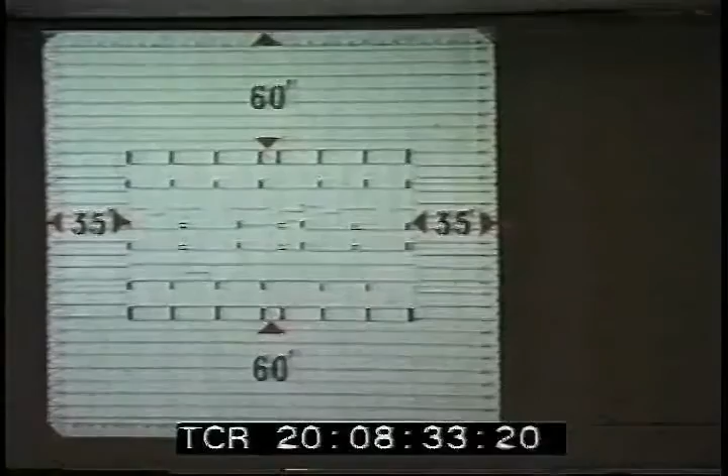So the structure has a 60-foot clear span on two sides and a 35-foot clear span on the other. One thing to notice is that the columns in this direction are very long and hence very strong. They're box columns, very big box columns. In this direction, there are lots more columns that you strike a line through, but they're, if you will, in a weak axis, so they're much less strong.

And a lot of controversy over moving all these businesses out of that space. A lot of controversy. But they were well compensated for it, of course, but I don't think you can really ever get compensated when you're upended. And this whole district disappeared out of New York. There was no replacement for it. So there was no place you could go. Instead, there was a store here and one over there and someplace else.

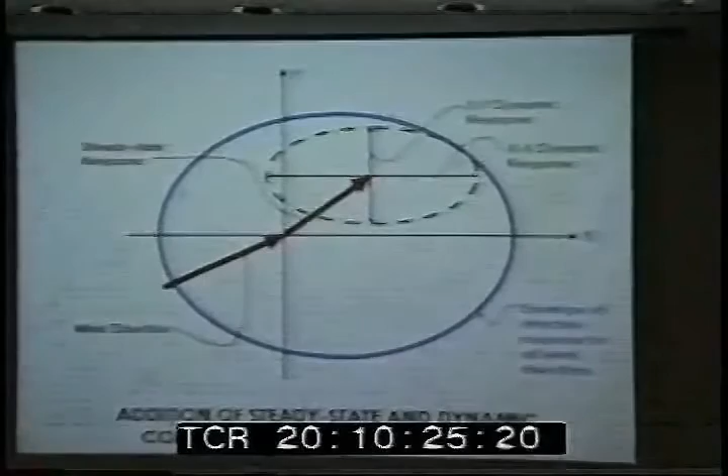Now, we surmised, we didn't know, but we surmised that in the wind, if the wind blows, say, in this direction, that the building would lean more or less downwind, not directly downwind, but more or less downwind, and then would oscillate about some place. This came from experience that I had in working on offshore structures. I knew that was kind of what they did, and I thought, well, a high-rise building might just do the same thing. You have to understand, the dynamics of high-rise buildings in the wind did not exist as a subject at that time.

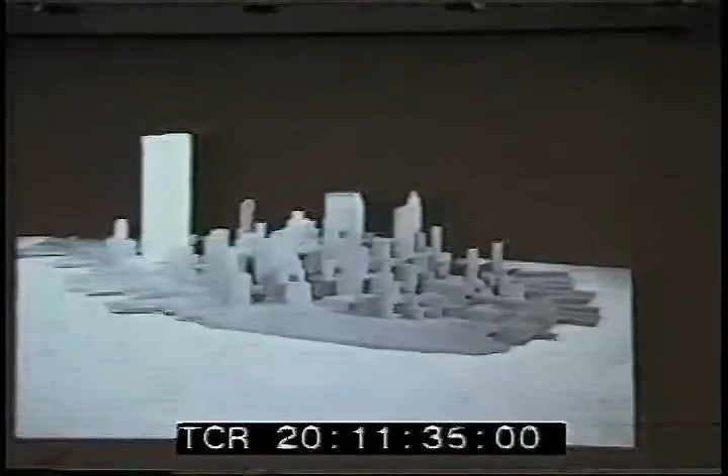So here you see an example. This was an anemometer on the telephone company building, now called the Verizon building, and you can see another anemometer on top of that spire.

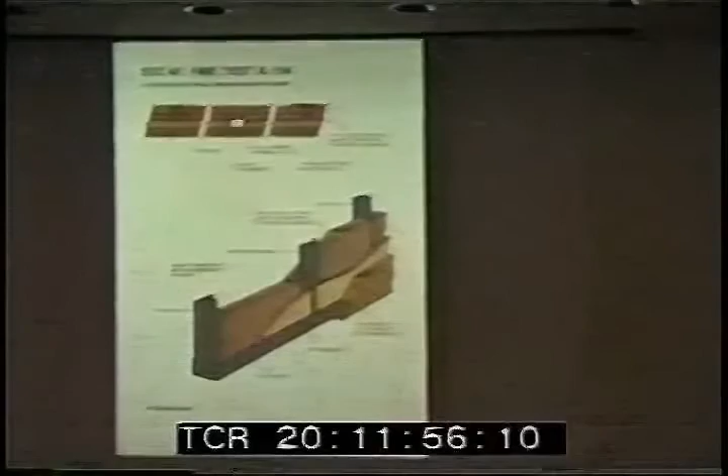The shaft wall partition system was wonderful because it was designed specifically to allow the structure to move without restraining it, and to stay airtight while moving. I arrived at the idea because I rode on top of a lot of elevators in New York City and went through all the buildings I could. The tallest building I'd worked on was 22 stories, so I thought people who'd worked in New York might know something more than I did, which for sure they did. I decided the basic partition system was terrible, sat down and came up with this concept, which was then developed by U.S. Gypsum.

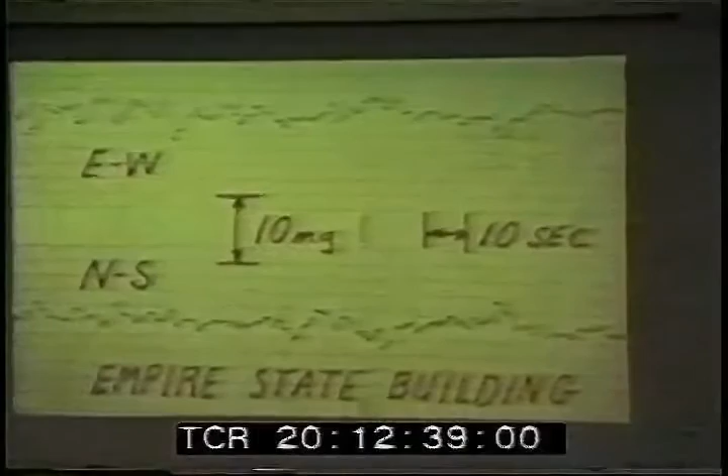We did a complete structural analysis of the Empire State Building. This is a trace taken from accelerometers on the building. You see it's almost random, with no neat oscillation found. The only way to come up with a period of vibration is to drop all this data into a computer and analyze it, and it tells you it's around 10 seconds, but you can't measure that here. So you'd say that's a 10-second period building—no way, it's entirely different.

But we did a structural analysis of the Empire State Building frame and found we could develop the stiffness of the frame, so we knew just how it would deflect under a given lateral load. Then, by taking this data from accelerometers and knowing the density, it's possible to experimentally determine the stiffness of the building. We found the difference was a factor of 5—the building was 5 times stiffer than the steel frame. That all came from the infill action of the masonry, and we were designing a building without any masonry.

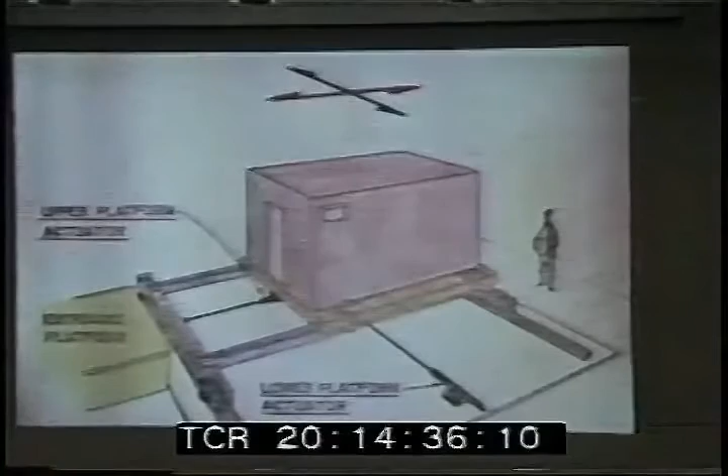We tested people who had no idea what was going on. It was very carefully disguised, so when you went into the simulator you didn't see any of this junk—you walked from a very nice little office into the simulator. We gave a little eye test, and then started the platform moving to see what happens.

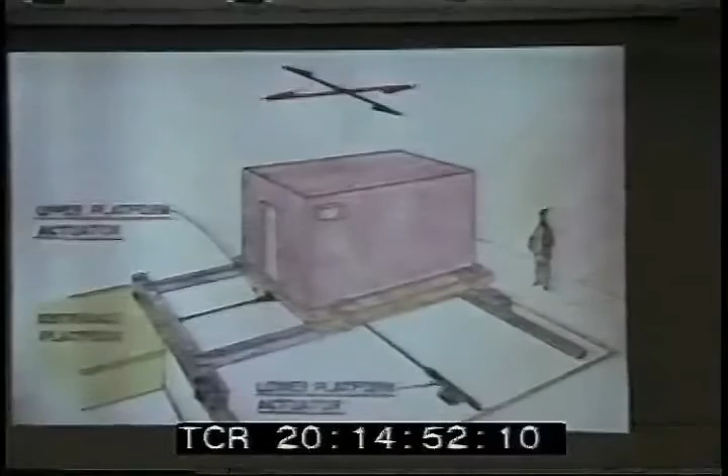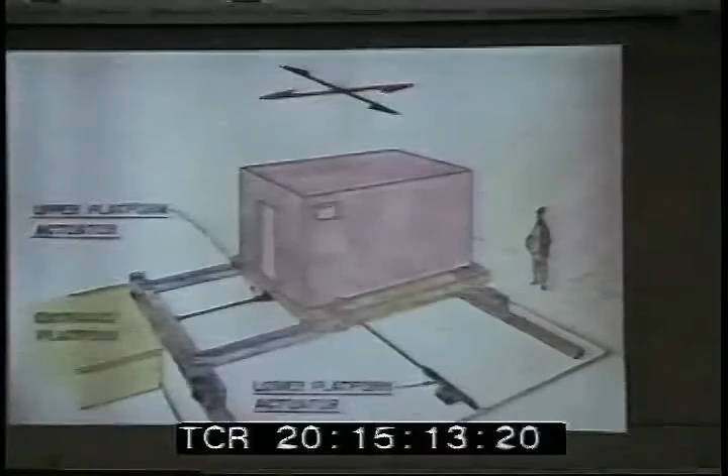We had other people who were told it was a motion experiment, and some people we retested who had been tested once before. We had one man who was told nothing, and you have to understand it's a little town in Oregon—little buildings just don't move in little towns in Oregon. He was actually holding onto the wall and would not respond to the fact that there was a problem. He was holding onto the wall while people were falling over, because we could really get this thing moving.

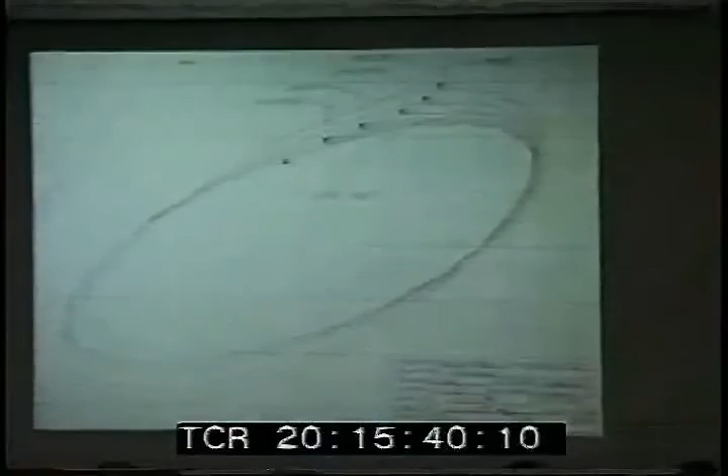And then the dampers, very simple devices. They're about 1 meter long, 3 feet long, and made of viscoelastic material, which in itself is a long story. This is a load deflection diagram for a damper, as you probably know if you've worked in the structural or electrical field. The area underneath this curve is the energy consumed in the device.

But anyway, we tested lots and lots of panes of glass to find out how strong it really was, and also to determine what kind of glass to use. And ultimately, a semi-tempered glass went into the project.

And interesting enough, about half the breakage of the glass has been due to bullets. That is, people from far away get a rifle out and lob bullets for fun, I guess.

And at the lobby level, one guy was going by in a pickup truck with a slingshot and 1-inch diameter steel balls, and he would shoot it at the glass. Each time he was successful in breaking one, it cost $15,000.

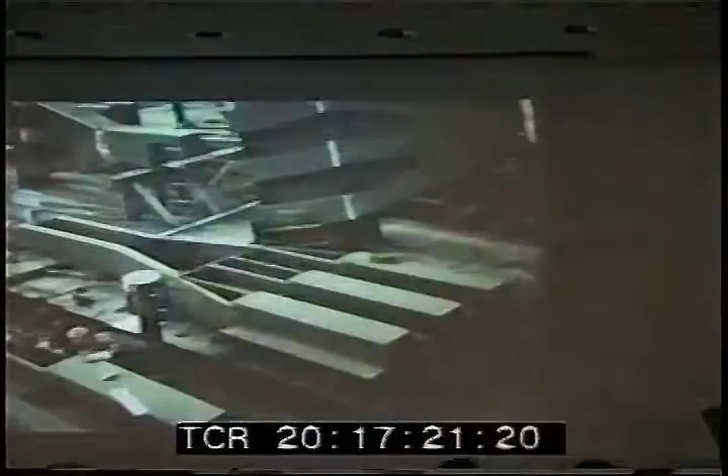Here you see the fabrication details, the length and width, the grade of steel, the welding that went into it. Everything was provided to the contractor in a punch card format. Those of you who are very ancient like me know what a punch card is. It's about so big, with lots of funny little holes in it, and from that you can read data. I don't know when they stopped using them, but probably before you were born.

Still using it for loading. Oh, I guess that's true. Well, we still use FM tape recorders too, but I don't know.

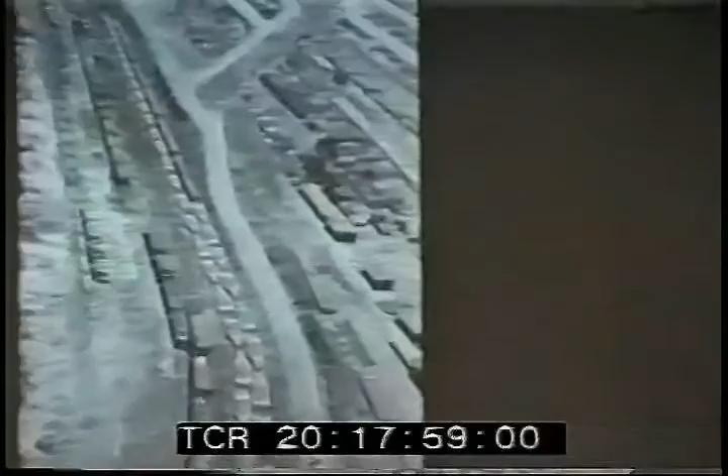Here you see some of those panels coming to the site, ready to be erected up in the project. So it was an enormous logistics operation.

So that panel we were talking about was spliced here. This was also prefabricated. When these steel panels were being put up, it was February, and the workers said, hey, these things are split, they're cracked. Now, steel was pretty much topped out, and if you don't think having split connections at the bottom is an interesting subject, it was, of course.

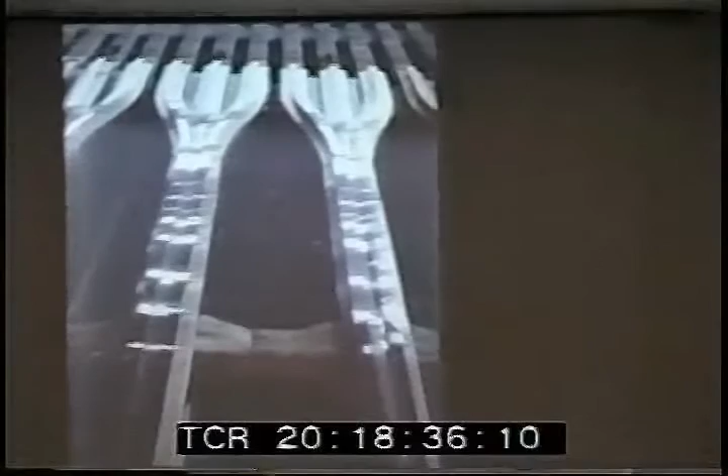So we pushed the panic button and decided that the problem came from water inside and freezing. And again, we went as far from New York as possible. Actually, we went to Berkeley, hired two esteemed professors who produced a report after a month and a half of work. They agreed that it was a freezing problem. In the meantime, we had fixed them all, of course, because you can't wait around for reports.

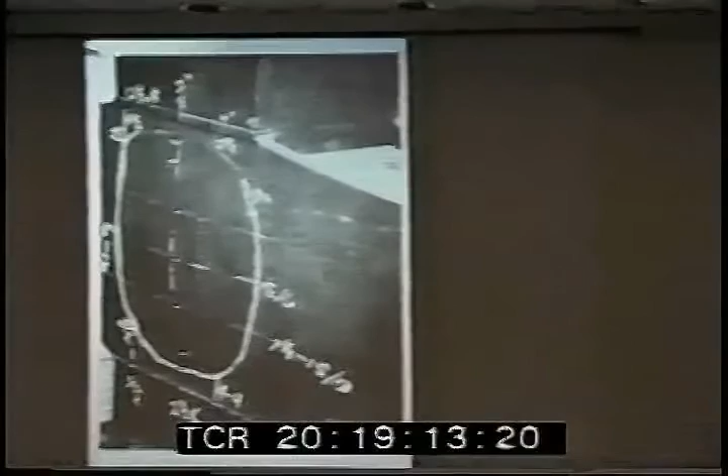This is sort of a standard piece. You see this bulge. Now, our client, the Port Authority of New York and New Jersey, was a fantastic client, absolutely incredible. They never said no on any subject. Well, they could be a little tough sometimes. But this is one instance when they overrode our judgment, and that is, they put the control of water inside the structure in the hands of the contractor. Our policy is seal plates on all box sections so that you cannot get water inside, for this very reason.

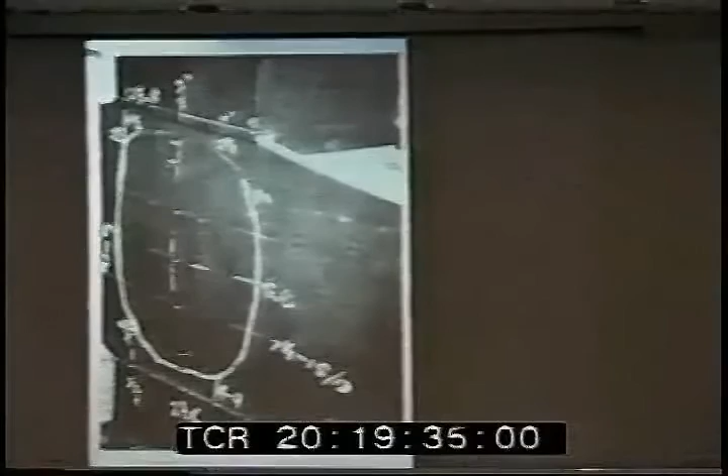That night, some 85 pipe columns broke on the adjacent small buildings under construction. These box columns were used for everything—if you had a hose with water running, you just put it in the box column, which got people wet below. So there was water everywhere. We took 600 gallons of water out of some of these columns. On this billion-dollar project, after it was all done, a completely new team went down, looked for water, and found it. So, very big problem with water inside the column structures. But anyway, we got rid of all of it.

It's a prefabricated wall panel. There were thousands of these manufactured.

All the steel plate came from Japan, recorded on punch cards with no way to send them across except by airplane. Today we wouldn't bother, but this plate and so forth were all fabricated in Japan. In the United States, the steel industry's mindset was 'this is what we make, how can you use it?' In Japan, it was 'what is it that we can make that you could use?' So we bought steel for the project in increments of 5 KSI, which is fantastic for the overall toughness of the building. We didn't have over-yield material in the project.

The Port Authority legal department said this printout should be the basis of the contract. We said no, it's got to be the punch card. They insisted it had to be the printout, and the legal department won at first. But ultimately, contractors came back and said they'd saved all this data and wanted it in punch cards instead—they didn't want to use the printouts at all, just the cards, and that should be the basis of the contract. Eventually, the legal department relented.

They were assembled something like this: a spandrel plate, a big broad plate, and the inside face of the column plate were butt welded together. Then, shown in blue, another assembly with the stiffener plate inside was added, and an outside web plate was added last. Notice there's no weld between the stiffener and the outside web plate.

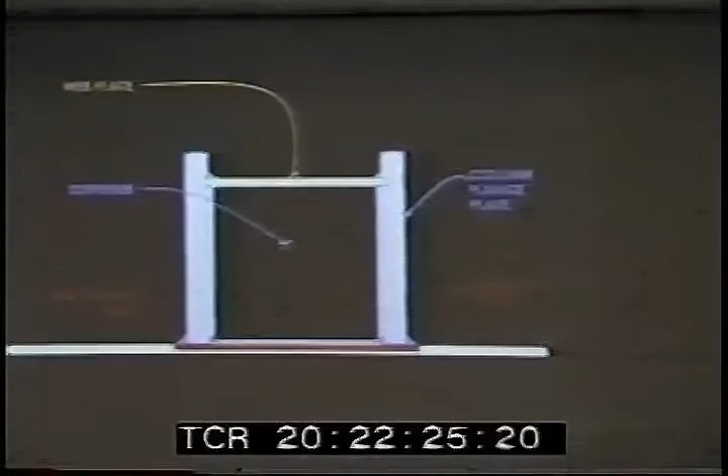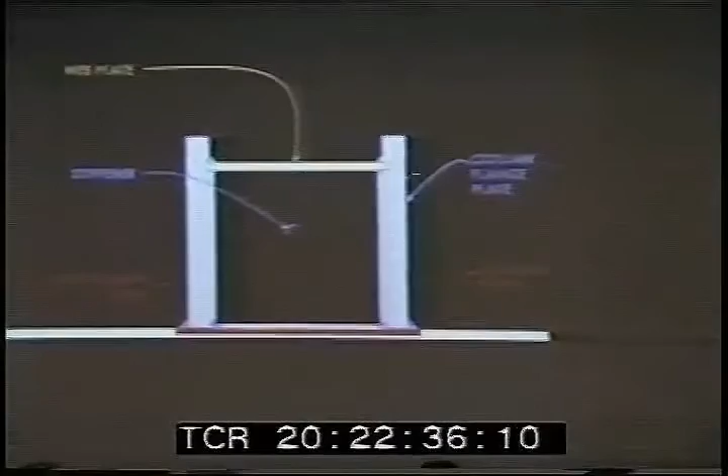Today, you'd just pop this into your favorite finite element program and out would come an answer. But at that time, that technology wasn't available, so we did most of the finite element work based on very big programs, not suitable for actual practical work. We did a lot of finite element work on the World Trade Center just as an example, and also did some physical testing.

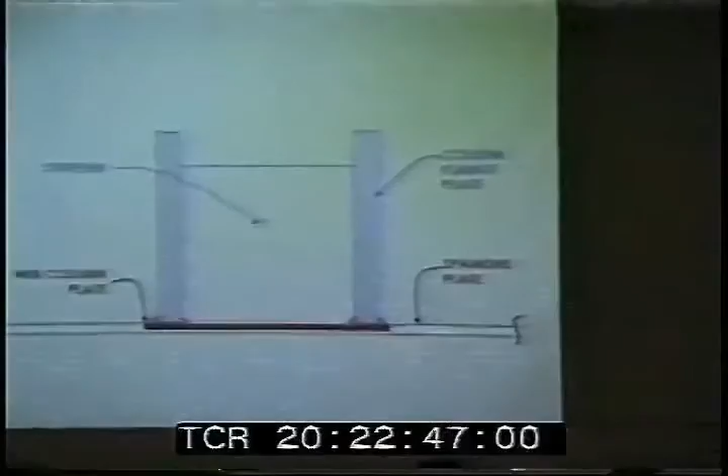The way it was put together: first the bed sheet and the flat plate, then the stiffener and the flange plate, and finally the web plate on top. It was done with such precision that we could maintain a very tight tolerance between the architectural work and the structural work. Normally we'd allow about 2 inches, or 4 inches at the very least, but since our columns were 14 inches, that 4 inches was a big number.

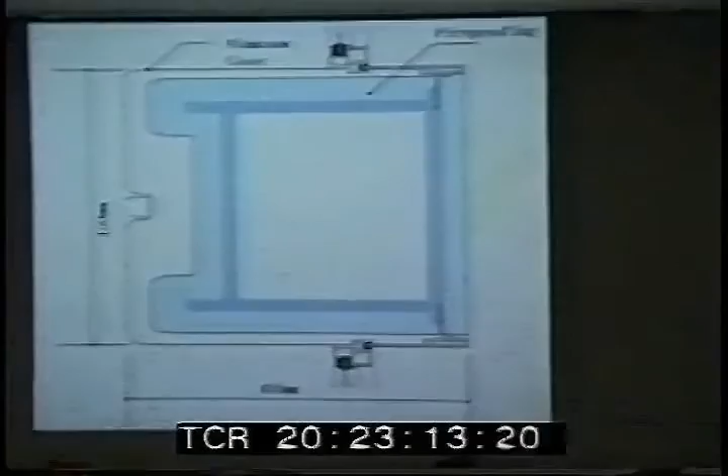Here you see them in fabrication—this is that first bed sheet, fabricated first. In my experience, it was the first time steel fabrication was done with the material moving by the workman rather than the workman going to the steelwork, leaning on technology first popularized by Henry Ford.

Then they were assembled into big panels, which went into a jig where the ends of the 3 columns were all milled without moving it. All the bolt holes were drilled in the panel, again without moving it. So we maintained very, very tight tolerances in the panels—they went together sort of like a Lego set. It was fantastic; they just went up with no problem.

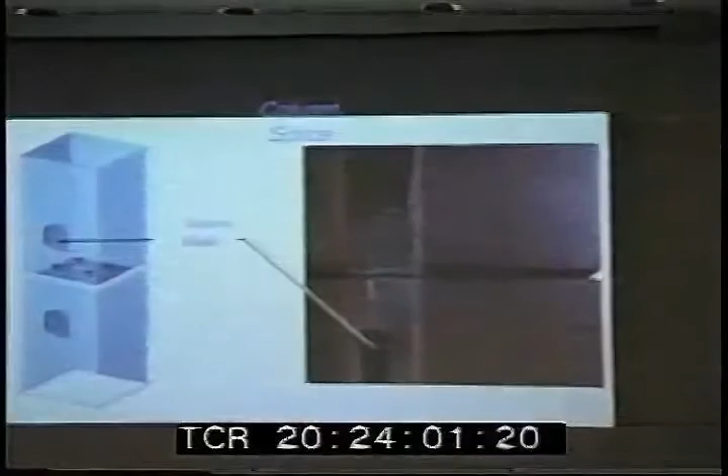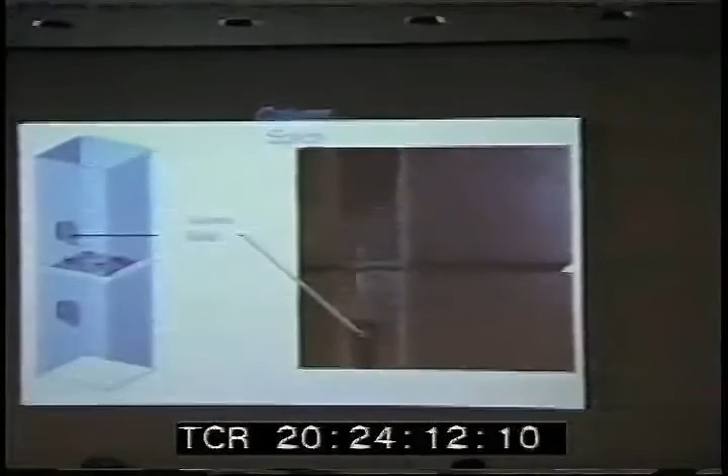When you put them together, there were two holes—a large one at the bottom of the column and a smaller one at the top. You basically put the impact wrench for tensioning the bolts right inside the column and tensioned the bolts.

The floor system was prefabricated. In this case, this panel was 60 feet long, 20 feet wide, with metal deck already in place and electrical distribution cells already in place. So when you put one down, you created quite a significant space—1,200 square feet.

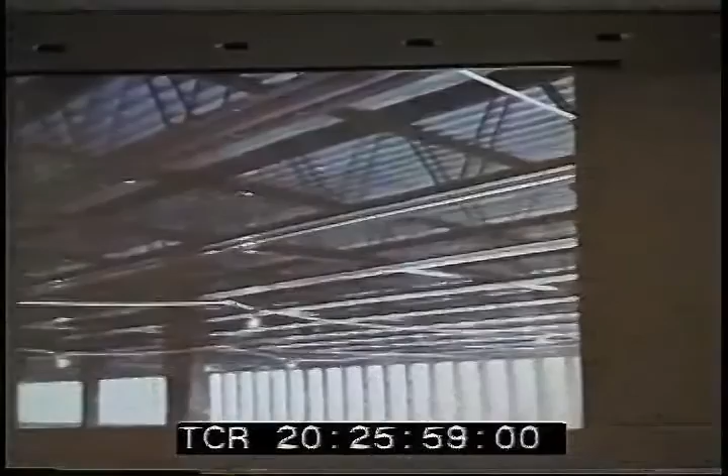So here you see something about the whole assembly. The prefabricated wall panel, prefabricated floor panels, and so forth. Not shown is the damper because they were put in later. The floor system, there's been a lot of stress about the floor system being very vulnerable to all sorts of things. But in fact, it was designed so that you could remove, depending on where you were, 2, 3, 4, 5, sometimes 8 of these trusses, and the whole system remained stable. It was a grillage, as you can see here, a grillage of trusses, not just a one-way system. Very, very sturdy system.

And a lot of talk about the connection of these trusses to the outside wall. The normal criteria used by structural engineers is that the connection to keep a column from falling off the building, if you will, is you use 2% of the axial load in the column. That's a good rule of thumb. So this is 2%, and this shows the actual connection capacity that was built into those spaces. So if you take the North Tower, it was designed for something like 15 or 18 times more than what you would consider standard criteria.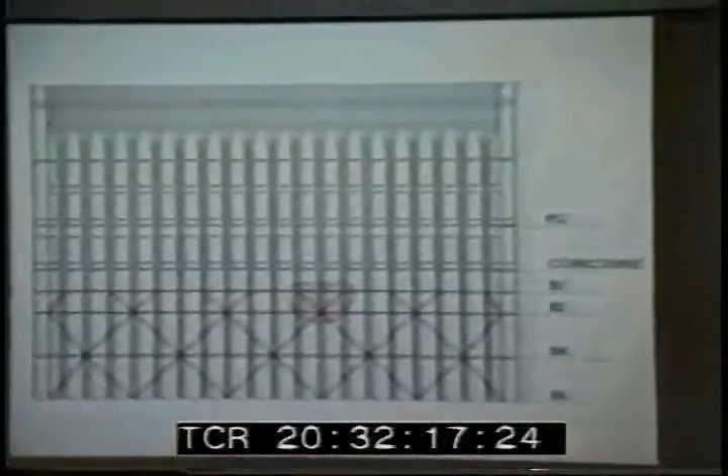So we drove into the city, and the bomb went off about, just coming from a metric world, about 6 feet from Tower 1, right in this area, right here. The bomb was about the same size as the one that took down the structure at Oklahoma City, almost identical in terms of the capacity.

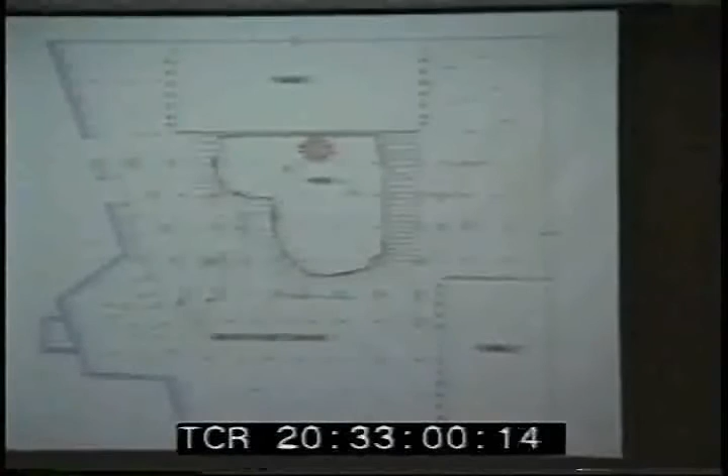But what happened was this steel wall, if you will, very, very heavy and robust, just reflected most of the energy of the bomb to the south. Blew a huge hole through the B1 level, and then caused structural damage about 350 feet into the south, still significant structural damage. But the bombers, I think, were trying to bring down the World Trade Center to make it collapse.

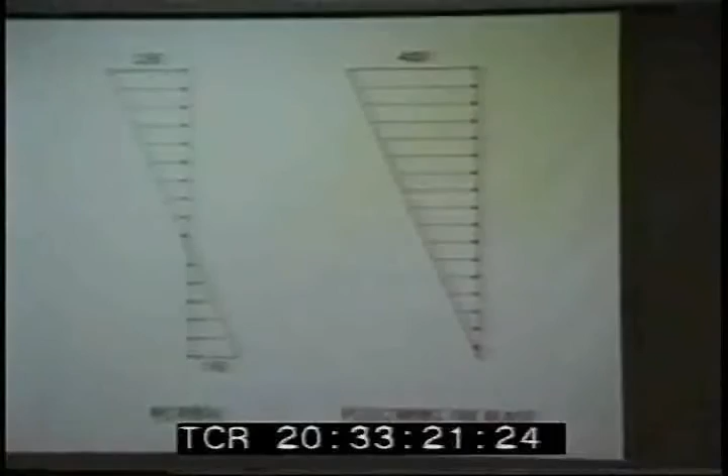But the most important thing that they did was they destroyed the airlock around the building. Remember I talked about stack action? Well, when you go through the revolving doors of a high-rise building, you're going through an airlock. That's to prevent the air from rushing into the building and up, consuming a lot of energy and other things.

So when the bomb went off, it created a huge hole at the base of the building, and the pressure distribution went from something like this to something like this, and all of this smoke and soot and so forth from the bomb area immediately rose up inside of the towers. And you saw photographs, I'm sure, of people coming out, the faces and clothes totally covered with soot, and great human suffering from that event. That was the worst thing that happened with respect to the bombing.

The next thing that happened was all of the debris from the collapsed areas of concrete work fell on top of the refrigeration plant. Now it's just a refrigeration plant, you build a new one, but the problem is that if it couldn't be got into operation by June, you'd shut down the World Trade Center because there's no operable sash, no air conditioning, you cannot work in the building. So Port Authority built temporary refrigeration plants outside.

Now the night of the bombing, just before midnight, 4 of us went down to the basement to look at the refrigeration equipment because I wanted to know what was underneath all the debris. I knew it was there. It was the refrigeration equipment. But 4 was too many people. Our flashlights were too small. So the next morning, I had a couple hours sleep, I went down by myself and looked at the refrigeration equipment.

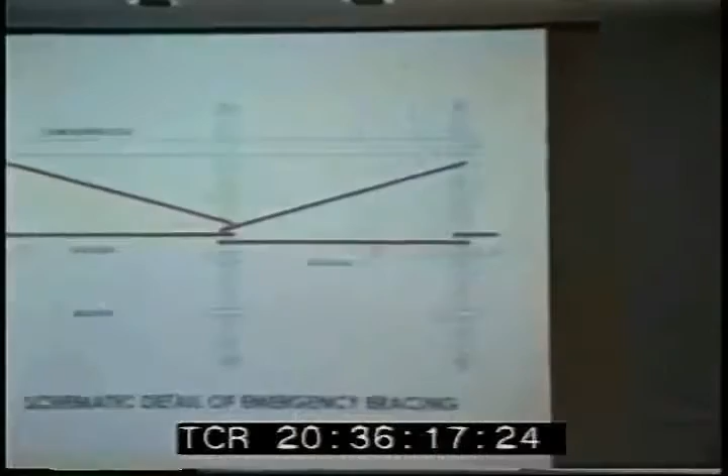This morning, made the sketch, had the fabricator into our office at noon time. They agreed this was a good way to do it. Looks pretty neat, right? The reality was not quite so nice, but it worked. I mean, you know, it was possible to do this really fast. We thought that we could start on Sunday, and steel was delivered on Sunday, but this was a crime scene,

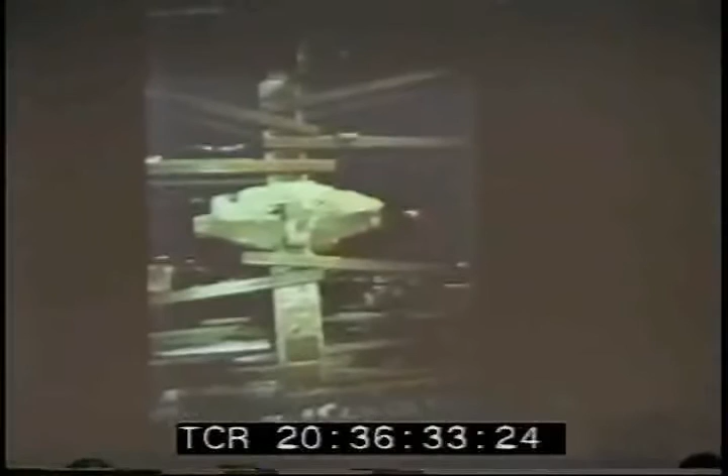and we had a sort of a summit meeting because there were 5 different police jurisdictions. We had a summit meeting about every 3rd day because someone there would say, well, you can't go into that part of the work. And our response was very straightforward. You can't go there either, because we controlled where in the project people could go. So we had this sort of a standoff every 3rd day.

But on Monday, we were able to get a hole through the floor and start lowering people down. In fact, this photograph was taken from a kind of bosun's chair, dropped down through a small hole into the middle of this great abyss. So this was the situation. Refrigeration equipment down here, a lot of rubble piled on top of it.

And one of the exciting things is that this support, which was really critical to this slurry wall, which keeps out the Hudson River, was working because the slabs dangled down into the debris. So it was the concrete structure holding up the refrigeration equipment, holding up the debris, holding up the collapsed slab, which was in fact keeping out the Hudson River.

So the whole logistics of take out this, do this, represented thousands of drawings that we produced in our office. And much of the work we did was just that. It was not so much designing things, as it was sorting out what could be done in terms of the actual operation itself.

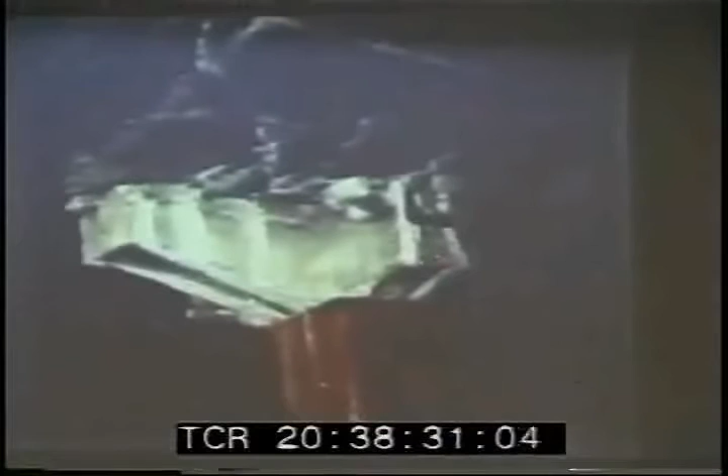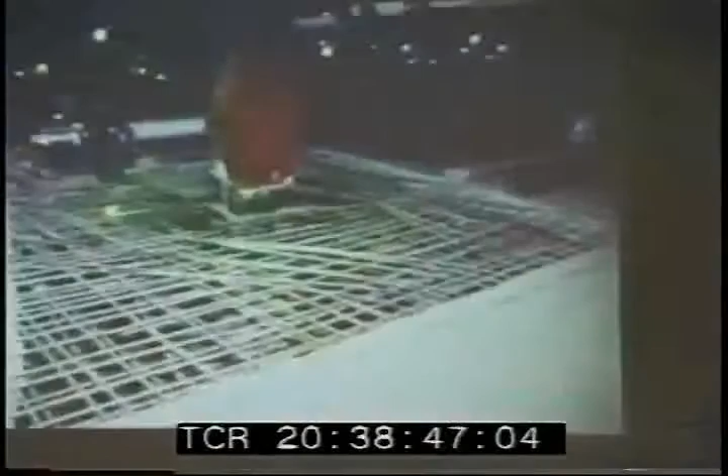This exciting structure is there because there was a big fire some 5 years earlier, and rather than try to evaluate the quality of the reinforcing steel and so forth, we just bolstered the slabs with these elegant devices. Much of the repair was like this. It's just knock out the concrete, which was all cracked and broken, jack up the slabs, and reconcrete it.

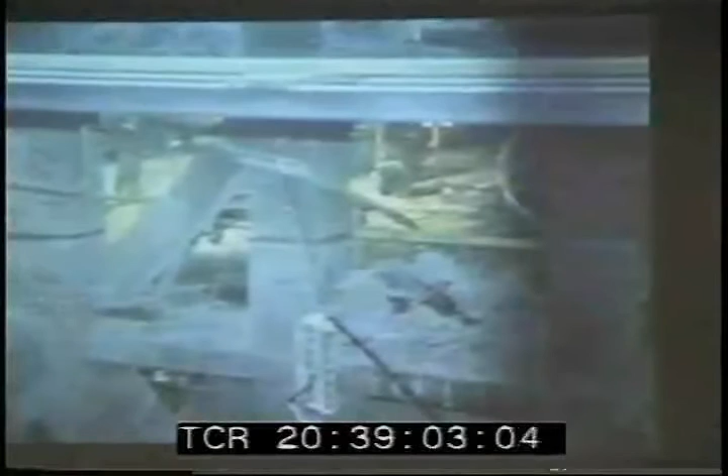Now the bomb went off 6 feet out this way from here. There was a diagonal brace here and this one, and a column. This diagonal brace is made like a T-section, bolted together in the center of the web. And if you look at the picture carefully, you see the flange of the T goes right by the column. It doesn't intersect the column. It goes right by it, and it's a kind of an applique.

And the detail works extremely well because these columns are not exactly where they're supposed to be. They're always out of position. They're twisted a little bit. So this detail allowed us to carry very heavy loads through the system without having actually connected to the column itself for large forces. Anyway, this brace went inside, killed 2 people. The outside piece fell into the hole and was never found. It just got carried out with the debris.

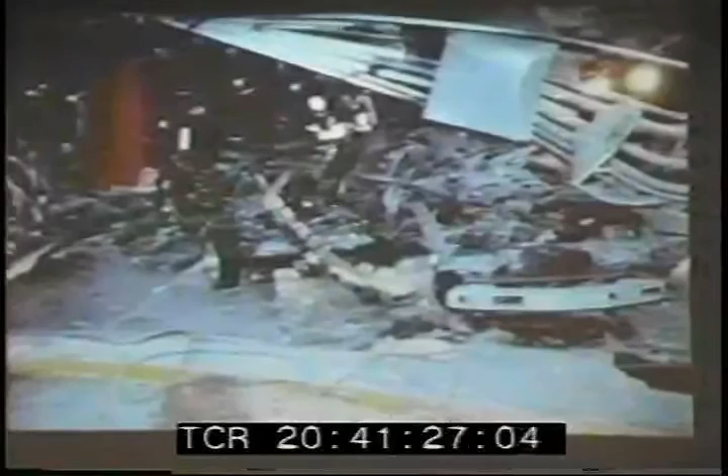Wherever there was structural steel around, the concrete suffered more. All of the telephone conduits from Lower Manhattan went to the telephone company building through the basement of the World Trade Center. This is a tiny fraction of it.

So we put a team to work around midnight, and at 9 o'clock in the morning we went down with the drawings of how to hoist all this conduit back up and get it off of the cars, because you have to remove the cars before you can get to the structure, and you had to inspect the cars because that's what police do.

Anyway, interesting enough, not a single wire was broken in the operation. I blame that on the contractor who was being too careful.

We had this terrible picture of the bomb squads out there with dustpans and whisk brooms, going through the rubble looking for pieces.

Later on, I testified for two days in the trial of the five who were convicted of this matter, and these people picked up incredibly small pieces of that van. Unbelievable - big pieces, little pieces. They had almost the whole van.

So every time you got near structural steel, the concrete broke up very badly because it could not deflect away from the pressure wave. Remember, this is not a static loading that's taking place here, it's more like instantaneous loading.

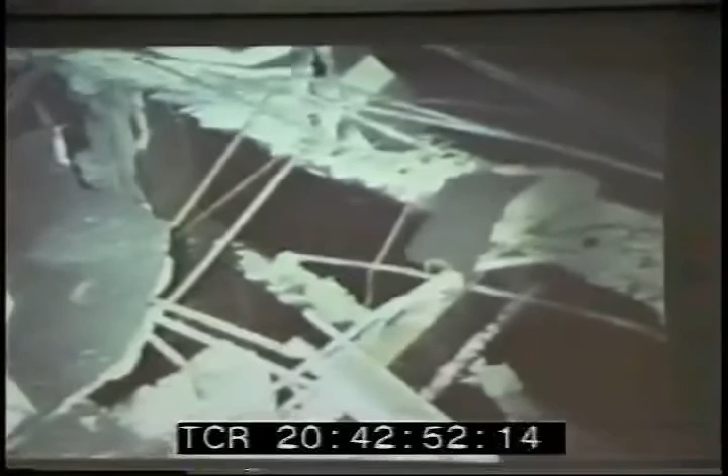Anyway, it was finished and this memorial was built. I always hated the memorial, but it was built, and again, we sort of went back to sleep and forgot about the World Trade Center.

And then Minoru Yamasaki came down with cancer, and he was in Sloan Kettering, which is a famous hospital in New York City. I went to see him every day.

He wanted me to look after the Trade Center, and not only that, he wanted me to make sure that the young engineers would continue to look after the Trade Center.

Anyway, then this is it. This photograph was taken from our offices. If you saw the slow motion videos...

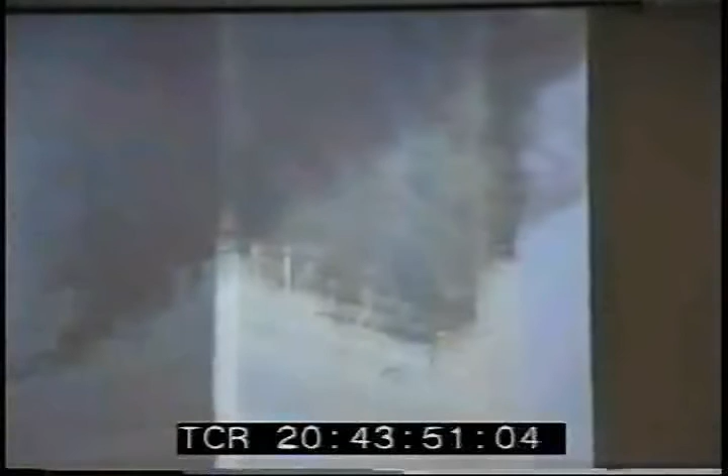...where they were just looking at images one at a time, you discovered that the whole airplane disappeared into the south facade and could not be seen, and then the great fireball erupted.

So this is the north face of the North Tower, and you see that a very substantial amount of structure was removed, and yet the structure above was able to span over this huge opening, seemingly without stress. This is a sort of blow-up that took place.

Okay, a lot of you know about energy and impulse and momentum and all those things, and I don't want to have a big discussion here on that subject - how much of the energy went into crumpling the airplane, how much went into ruining the buildings, and how much went through and came out the other side.

This is just to give you scale. The Mitchell bomber that hit the Empire State Building had this much energy - it's just a little mark here.

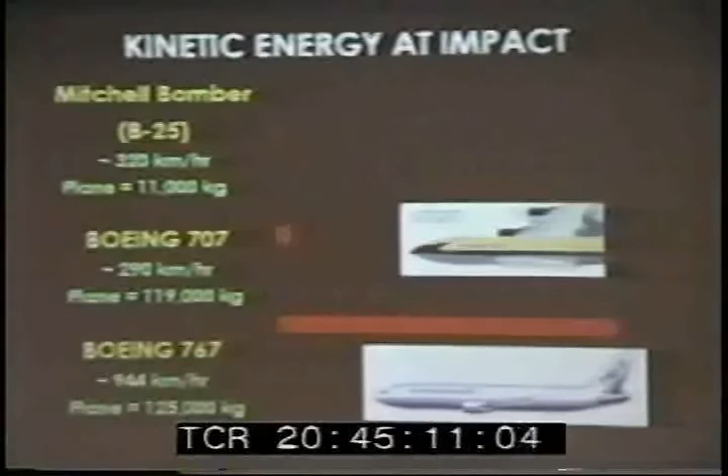We designed for the 707, but it was a more or less fuel-empty 707, because it was a landing 707 that was lost in the fog, so obviously they didn't have the hammer down on the throttle. This, in fact, is the kinetic energy of the aircraft that struck the building, so you see it was many times larger than the design criteria.

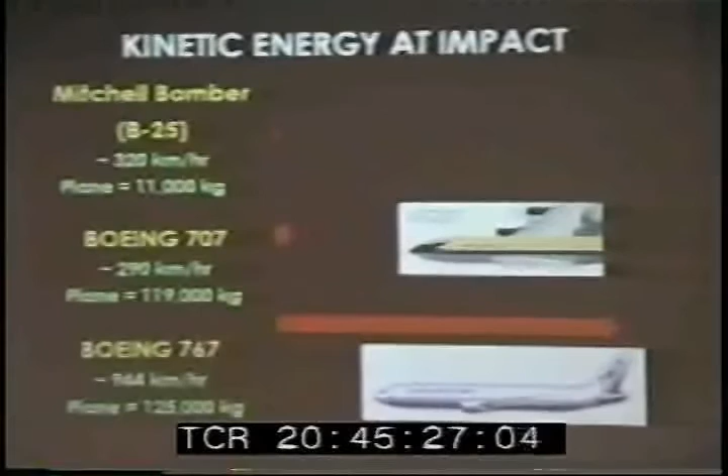The fire safety issues in the building were not our responsibility, although, you know, we dabbled in most everything. But in any event, I don't think anyone knew what happened when you crashed a 707 - all those tests were done later.

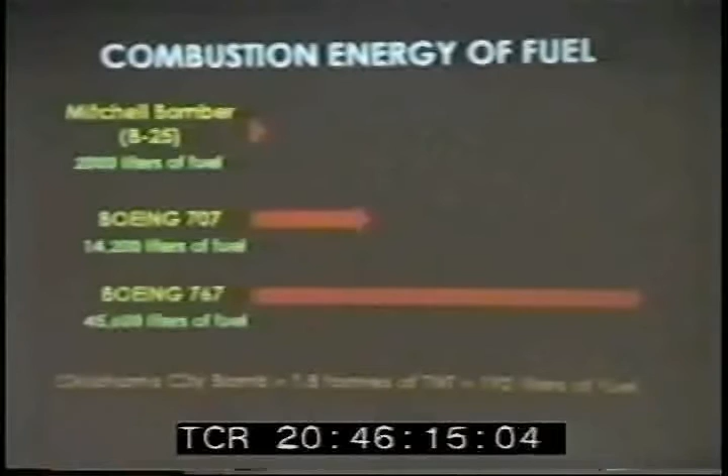And again, this is not a good comparison, but the bomb at Oklahoma City, which is pretty well documented - even the one at the Trade Center was about 200 liters of fuel, compared to 45,000 to 46,000 liters in the 767. So you see a huge difference in the amount of energy released.

In terms of kinetic energy, we can't use the Mitchell bomber as a comparison because it's too small in terms of energy release. But here is the 747 compared to the 767, and this is the new Airbus.

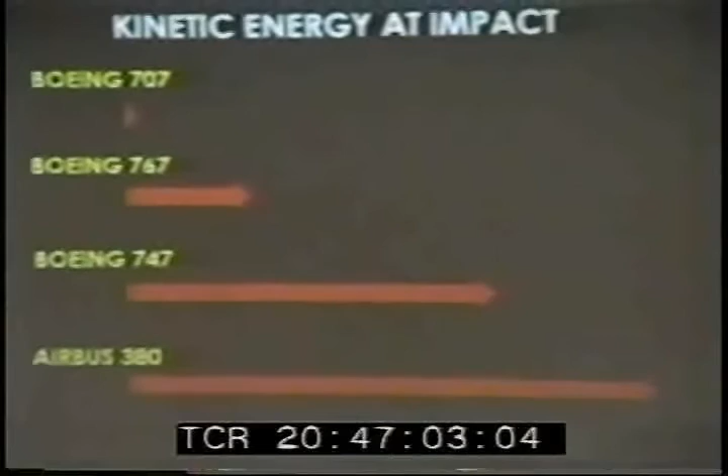In terms of fuel, it's not as startling, but still, when you think about what happened to the Trade Center with not quite 2 tons of TNT equivalent, which is about 200 liters of fuel, compared to the over 300,000 liters that comes with the new Airbus, you realize it's not practical or sensible. You can design anything for anything, I guess, but you can't design buildings that you or I would ever want to live or work in for this kind of circumstance. Totally out of the question.

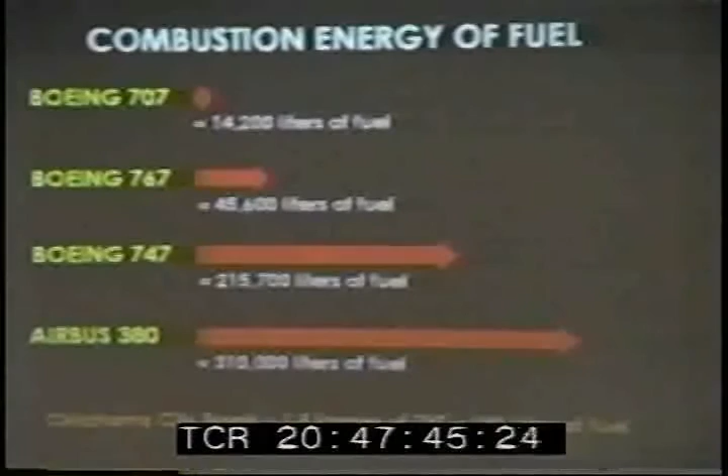Engineers have written saying it's patently ridiculous if the project wasn't designed to take the impact of the aircraft, and I understand what's in their mind.

You could land a 767 inside of the World Trade Center. It would look like this. This is the North Tower. Remember, the plane is traveling in this direction, into the strong axis of the columns. And in the South Tower, in this direction, it's hitting the weak axis of the columns.

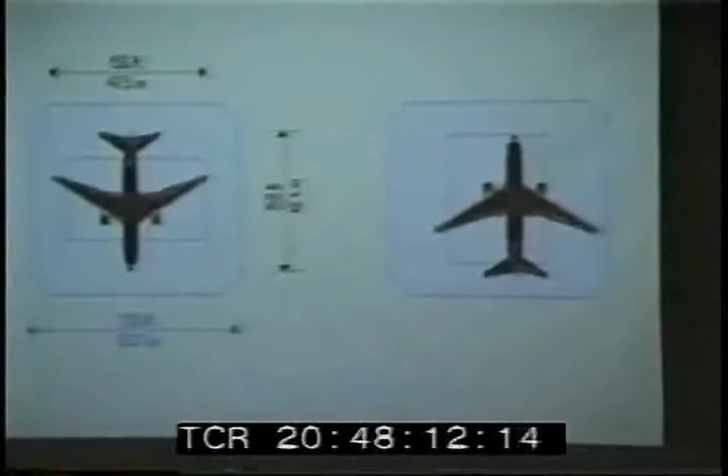This is the time-temperature curve, the standard ASTM time-temperature curve for a fire in a building. This one is taken from the petrochemical offshore structures generally. What happens if you have a petrochemical fire? You see it's very different.

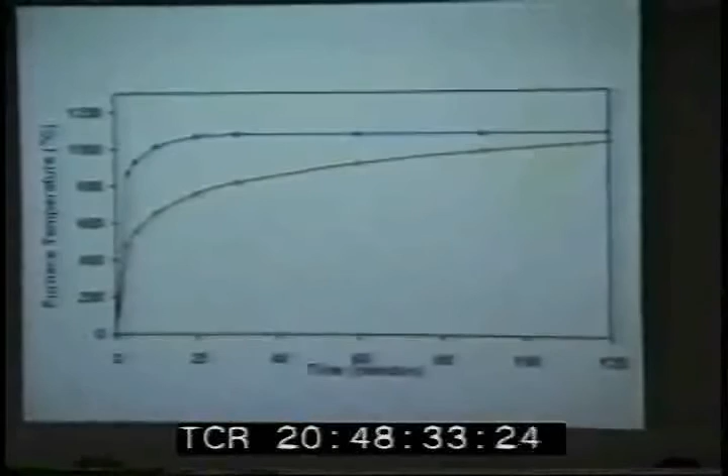People said, well, you should use concrete fireproofing, and this shows you something about the strength versus temperature of concrete versus steel, and you see there's not all that much difference. What happens when you put this high energy on the concrete is it sort of just goes off like popcorn.

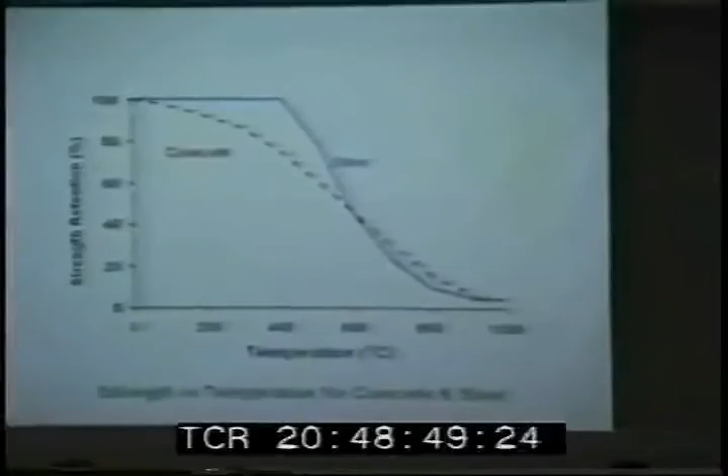It just flies away. Indeed, if you look at the columns of the Pentagon, which were square with a round cage of reinforcing inside, after the impact the columns were round. All of the outside concrete was gone, so the reinforcing steel was then exposed.

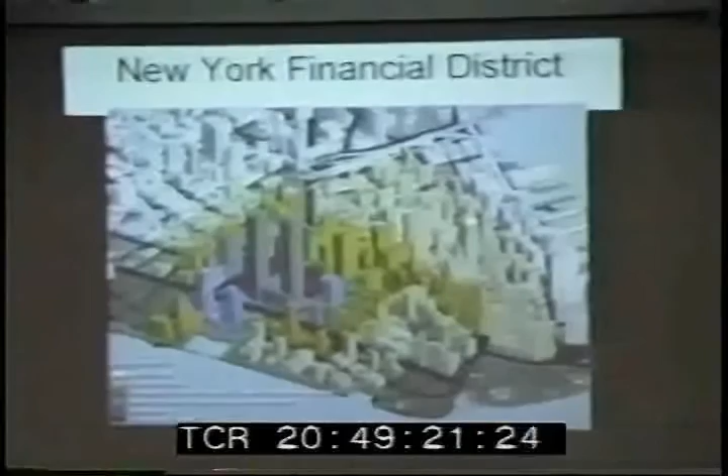This is the area that was at least partly damaged because of the circumstances of September 11th.

Most of the big catastrophic events are associated with windstorms.

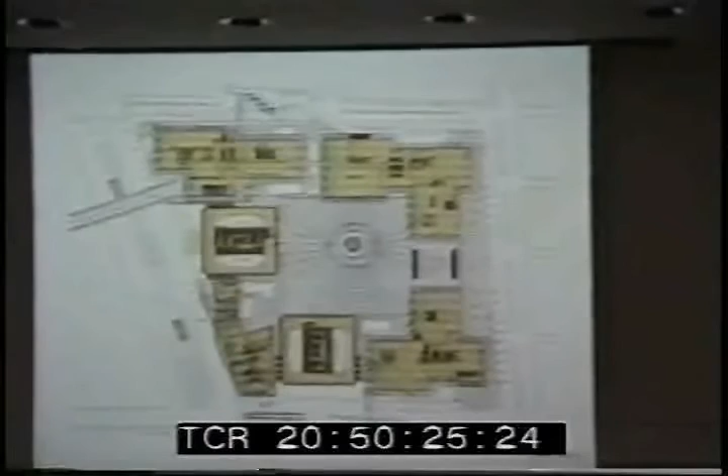Now, we were not the engineers for Building 7, so I'm not going to talk about that, but I'll show you some pictures. We did the base of the hotel, but other engineers did the superstructure on top of it.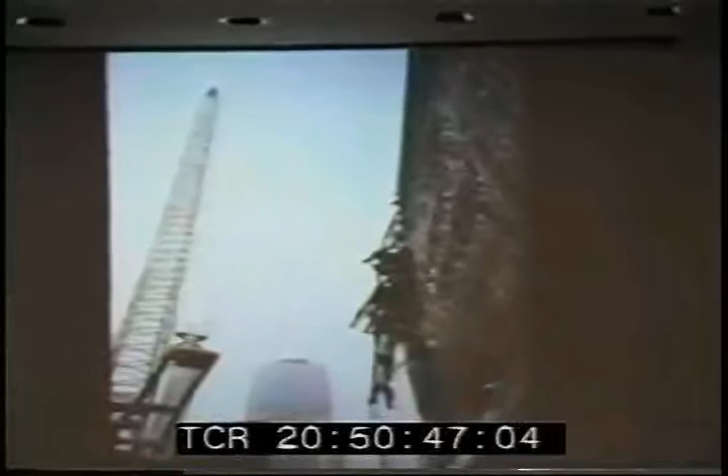If you go between Buildings 4 and 5, you see some of these wall panels. You recognize the three columns wide that fell down, and the building was still able to support them. You see these side columns are all bent and buckled and so forth—that's mostly from the fire that took place. Fortunately, the structure was very redundant. There's a moment frame that goes back into the building and then the columns on the outside, and there was a load distribution between the two so that you could take out columns or take out frames and still it wouldn't fall down.

There was a huge sculpture piece in the middle of the plaza—another thing I've always hated. You won't believe it, we designed a crate that this thing came in. I sent an engineer to Germany to supervise the crate, it was that expensive. It came here, and then after the event, it looked like this. So it did pretty well.

This is the east wall of the North Tower. This is part of the services core of the North Tower. Looking at what was the South Tower.

You can see it was not a real safe place to work. All kinds of things hammering out and rooted in who knew what. This wall panel was spliced up here someplace. Nobody knew the condition of the bolts, but still people were working through the area.

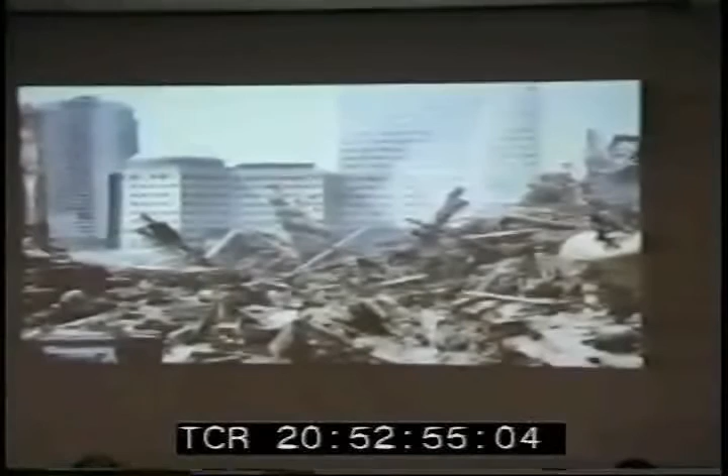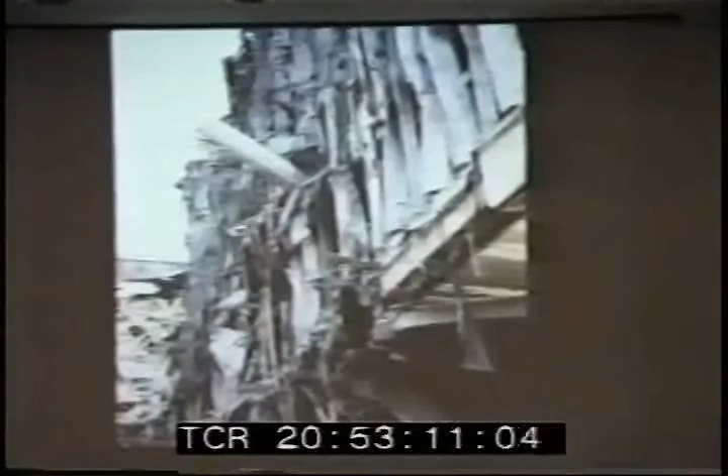So this is Building 5. You can see that this is a piece of the tower which failed inside, a rigid frame going inside, buckled columns, and the great tower. Where really heavy structure came down it would just wipe out the building. So you see here a whole bunch of structure fell and just took out the south face of Tower 5.

Our people, the respirators were mandatory. We didn't let people go out inside without them. There was a huge asbestos abatement program there, but most of it was gone, and there was regular monitoring in the air. The Port Authority was fantastic about things like that. But still, it was extremely dusty. We had the 47th and 48th floor of a building looking down onto the site, and we just taped up all the windows because it keeps the dust out.

That's Building 7, which is just to the north of the project. People have asked me about this pile of dirt. Why is there a pile of dirt in the building? Of course, concrete is made out of sand and gravel, and when you pulverize it, you get back sand and gravel, which looks like dirt. So this is really pulverized concrete that you're looking at. You see it everywhere.

This is again next to Building 7. This building stood up pretty well, except for a little damage. Building 7 collapsed right through here. Here you see one of the transfer girders from Building 7.

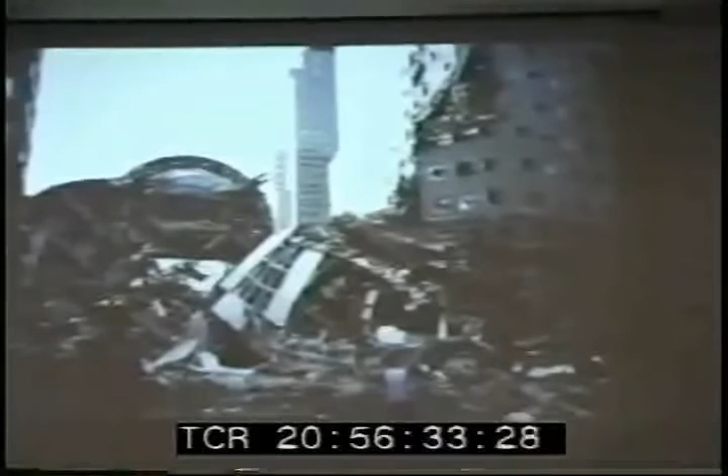That's the Winter Garden, designed by the architect Cesar Pelli, leading into Battery Park City. This end of it was pretty badly damaged - this used to be a bridge across the street. The other end, however, was in impeccable condition. Very dirty, but not damaged at all.

So here we look at what was left of the South Tower. This is looking towards the south and east.

The photographs were taken - if the National Guard caught you with a camera, they took the film. So sometimes the color balance is a little bad on these pictures because I was hiding it in my shirt and stuff like that.

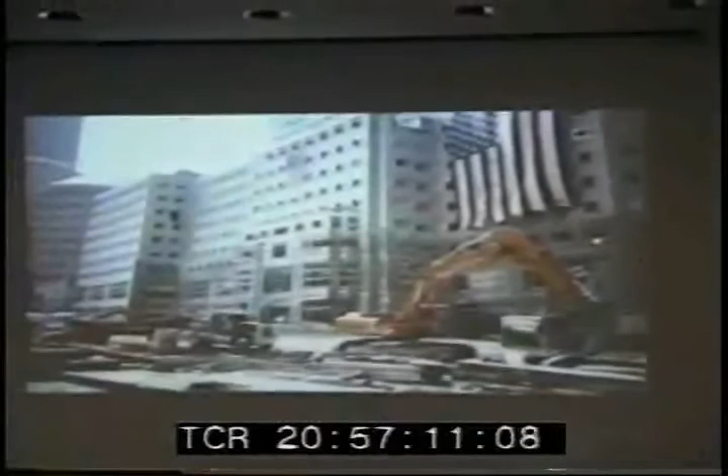Really relatively superficial damage to the buildings across the street, but still months before these buildings will be in operation.

Now, this structure is, in some ways, strangely beautiful.

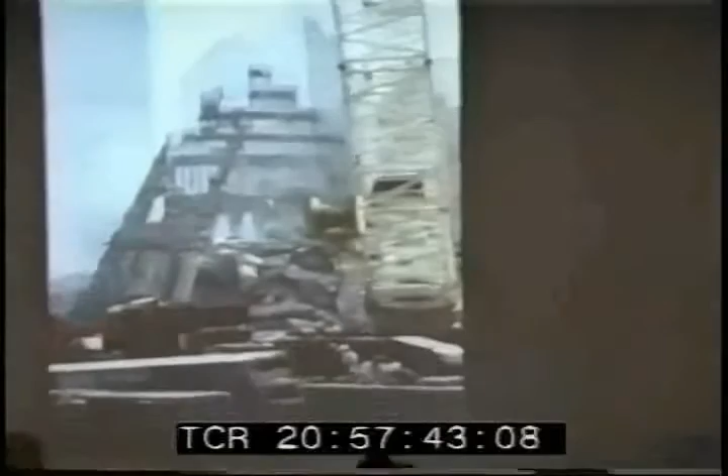This is a bucket brigade. These people are taking debris out of here and passing it back and dumping it in order to look for people.

Extraordinary, dangerous work. All this, remember now, is some days after the fact. Actually, this was the sort of regular path that everyone went through.

We looked up and saw this kind of stuff. It's inside of Building 6. Steelwork came down and sort of created an atrium inside the building.

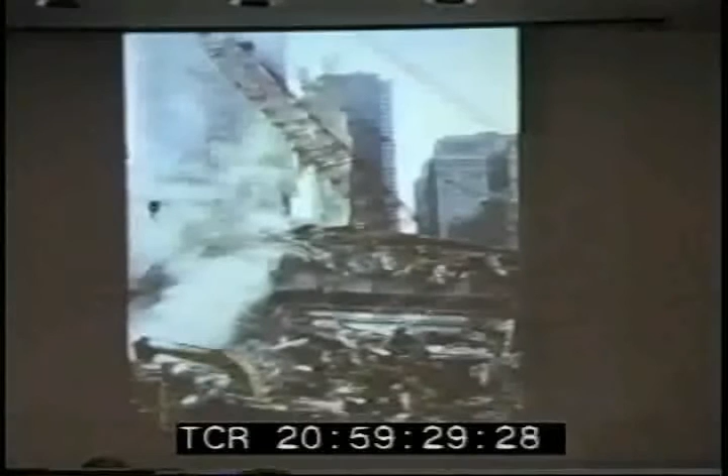This is Building 3, the hotel. The executives from the Port Authority left the North Tower following the impact. They were all located in the high 40s. They walked out, and they collected in the lobby of the Vista Hotel — the Marriott Hotel, I guess. Thank you, Marriott Hotel. They were in this building when it collapsed on top of them.

And they all survived. I mean, we had put in a transfer girder at this level, which somehow arrested the collapse.

Inside the core, the connections we call them semi-rigid. They were designed to stabilize the columns from buckling, so it was kind of like a rigid frame, but with lots of eccentricity. But you could see the welds did pretty good. They behaved as well as one could expect, I think.

And as it tipped out, these bolts, of course, went into high tension and failed. And if you stuck your hand inside, you could find the bolts, which is not easy because often they were way up inside the column. Classical tension failure in the bolts. The ones on the outside face, because it was rotating, they bent over and then cracked. So you saw this combination, very common.

These connections were made with either 4 or 6 bolts, at either A325 or A490 grade.

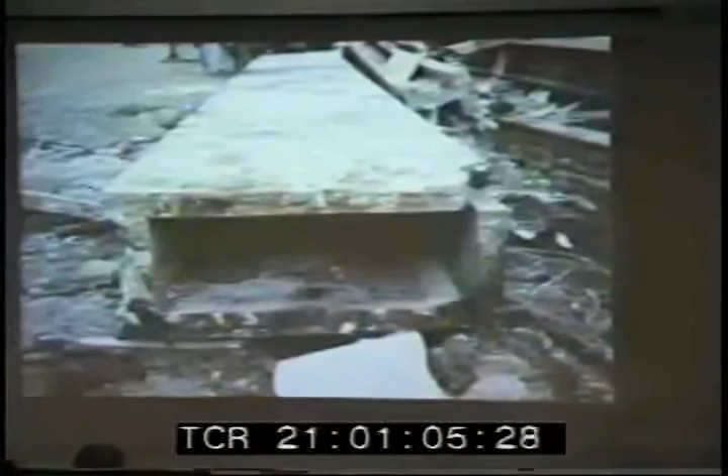This kind of column was low in the building, at the service floor. You see this 4-inch thick plate. It either hit something or was hit by something and fell — not due to some aircraft, but due to the building collapsing.

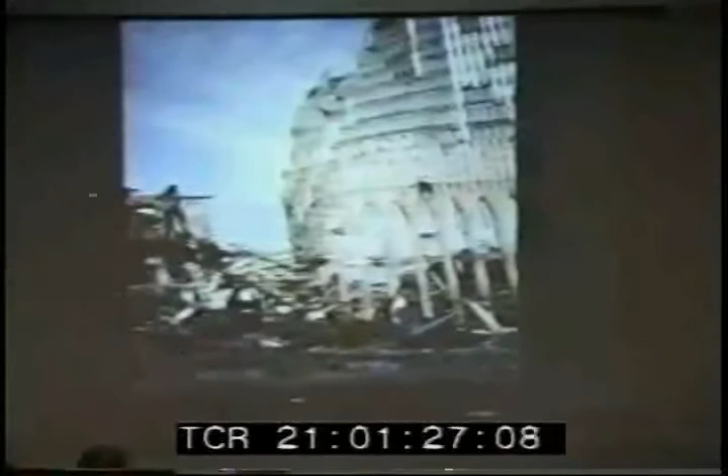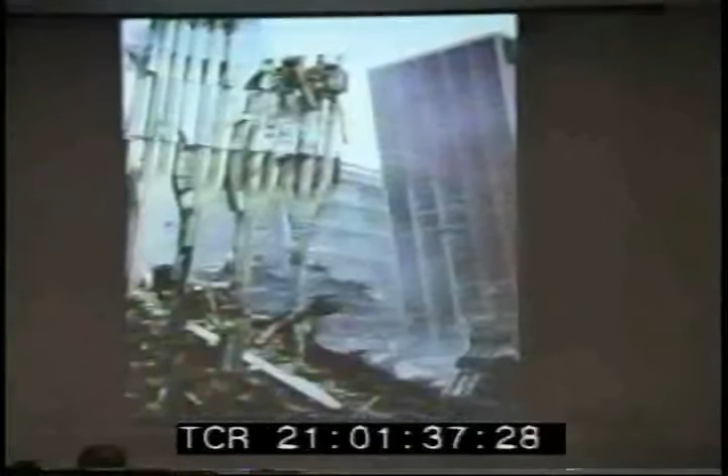The hotel was here. This is South Tower. Here you see one of those prefabricated elements now dangling off of the construction. There's no support.

Those of you who are not in the construction business might not understand this red stuff on the outside. If you're ever around a high-rise building and see it's on fire, don't stand there and look at it — leave. Because the fire causes the glass to break. When the glass breaks, it kind of floats down through the air. It travels long distances horizontally, and it floats and floats. So if you get hit by a piece of glass, you might not survive. This is just to keep the glass from tinkling down inside of the netting and going outside. The building immediately to the south had some pieces hit it, which removed this column completely.

Well, this is a big controversy. This is Building 6, and they wanted to demolish it by working from west to east. And we said, well, nobody knows how strong that building is now, and it's holding up this steelwork from the North Tower. So demolish this first and then go for the building. They added about 2 weeks onto the demolition time, but I think it was worth it, because no one really knew what would happen if you just went ahead and demolished the work.

The slurry wall was built with the tieback system. The light lines were the old tiebacks, which were long ago de-stressed, and the new tiebacks were put in place for the dark lines. Pretty conventional system. There have been some scary moments down there with the slurry wall. I'm sure it will never be used in the future as structure, it will just be used as an outside form for the construction of a new wall.

I said the ASCE FEMA team, or I guess I should say FEMA ASCE team, in New Jersey, at one of the junkyards, you could see the steel was just piled up in a tangled mess.

To the extent the steel has been found, which was near the site or at the site where the plane struck, that steel's been removed. I guess it's going to NIST, which has a multi-million-dollar contract to look into the issues.

There was one professor from another university who had set aside a piece of steel, which he said was from the impact area, and he was very proud of it. It had an aluminum piece of the airplane on it. But I looked at it, and as you can imagine, every piece of steel has a number on it. You don't just look at it and say, well, I think that might go on the 37th floor. You have to know where it goes. So it was a piece of steel from the 44th floor, which is rather far from the impact area, and the aluminum work was, in fact, part of the facade.